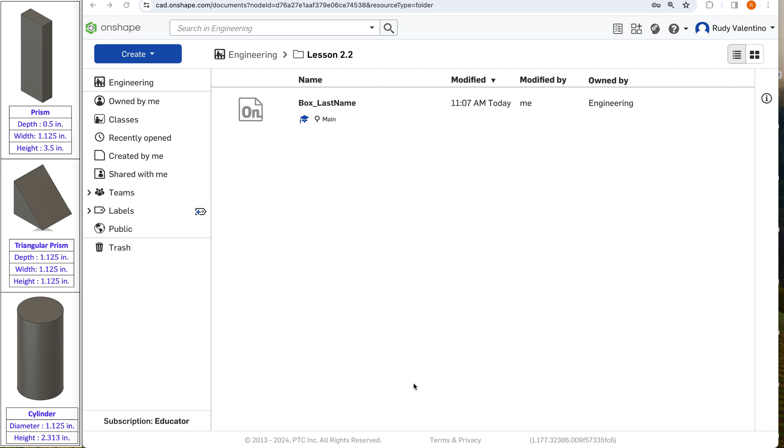We'll be rendering all three of these figures onto one design. So we made the cube, now we're going to create these.

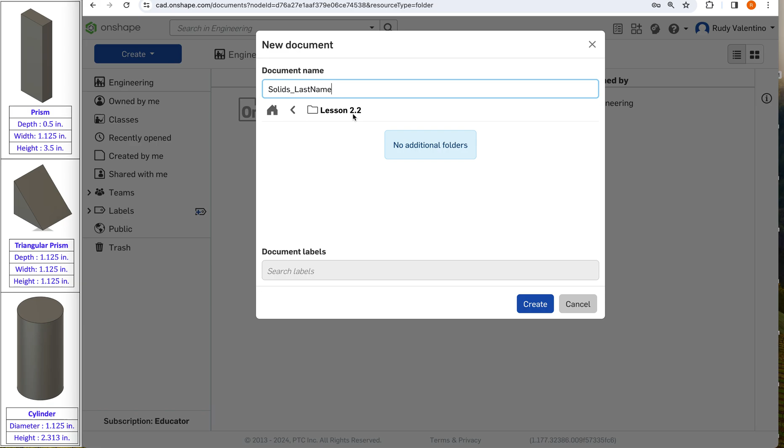The first thing you do is create a document, since we already have our folder, lesson 2.2. We're going to call this one solids underscore whatever your last name is. The last name will change from student to student, but that's what we'll save it as. So we've got our file right here. New file, once again saves automatically when you click back on Onshape, and we'll always have it.

So the first figure we're going to make is a prism. We're going to do 3 different sketches here, and each sketch is going to have a new figure. The first sketch is going to print the bottom of this prism. It's a half inch by 1 1/8 inches by 3 1/2 - 3 1/2 is obviously the height, and that's the one we're going to extrude.

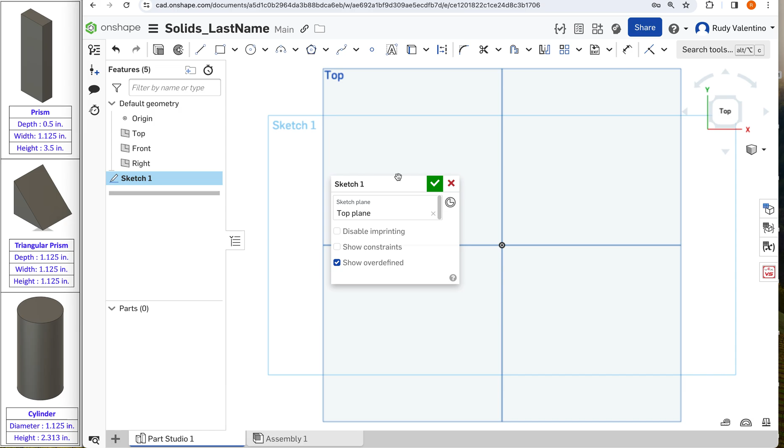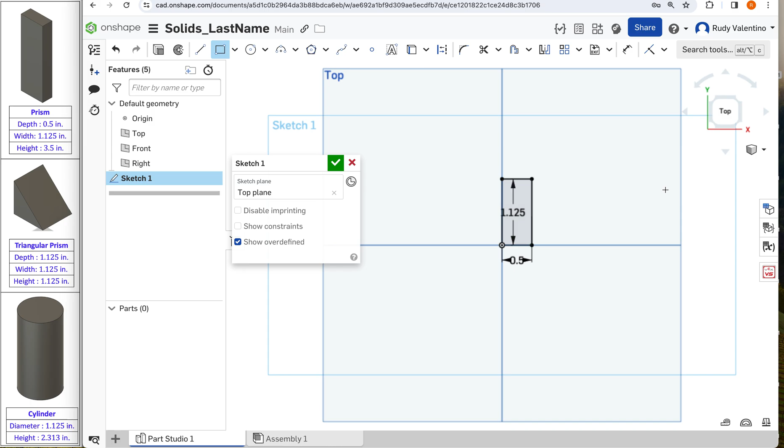So we're going to sketch on the top plane once again, click sketch top plane. I'm just going to drag this out of my way. I'm going to create a corner rectangle, use the origin, and drag it out. My dimensions are going to be 0.5, enter, and then my width is 1.125. It doesn't matter which way you go - if you do it the other way that's okay too, because you just want a rectangle.

Now notice right here my dimensions look kind of ugly - you can always pull the dimensions out, they look a little nicer, but that's for a later exercise. Anyway, we got our bottom rectangle. I hit there, then I hit my top piece so I can see a 3D view of it, and I've got a little rectangle here.

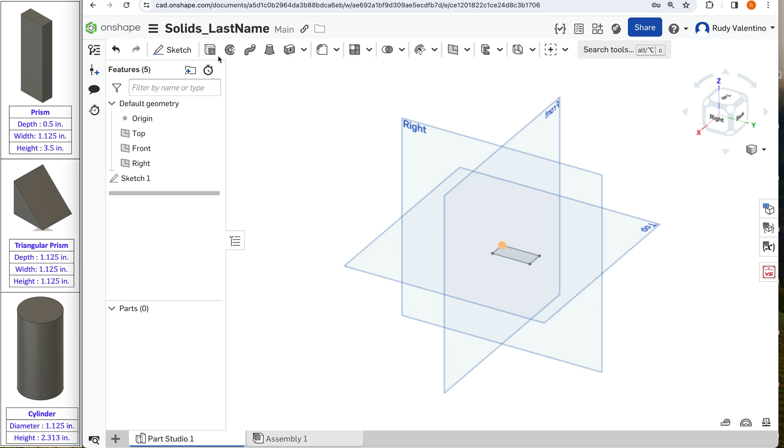Now I want to extrude this thing 3.5 inches. So I go to the extrude button, click on my rectangle, highlight it, and put 3.5. Notice I don't have to put inches - it assumes inches since that's the unit we've been using. I hit enter and it extrudes up. I hit my check mark and I am finished.

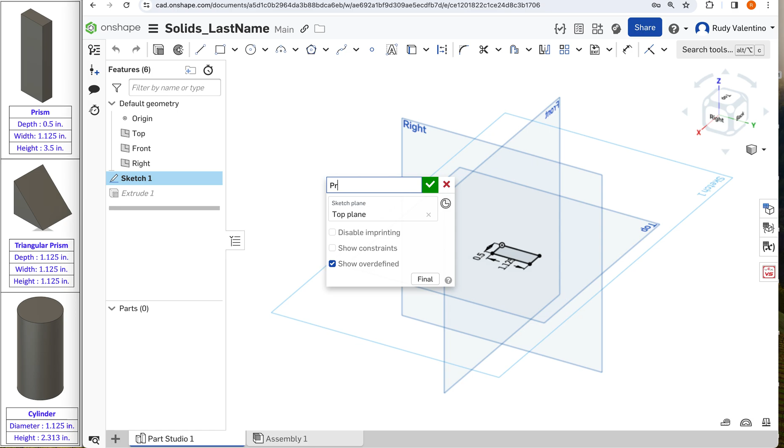So I have my first sketch all done - this is my prism. If you want, you don't have to, but if I click on sketch here I can go back and change it. I can also click on this little marker and call this sketch 'prism.' So now I know my first sketch is my prism, and I extrude it. Really the important part is that it says part 1 down here - that's the first piece. I'm going to name all these just to make them easy.

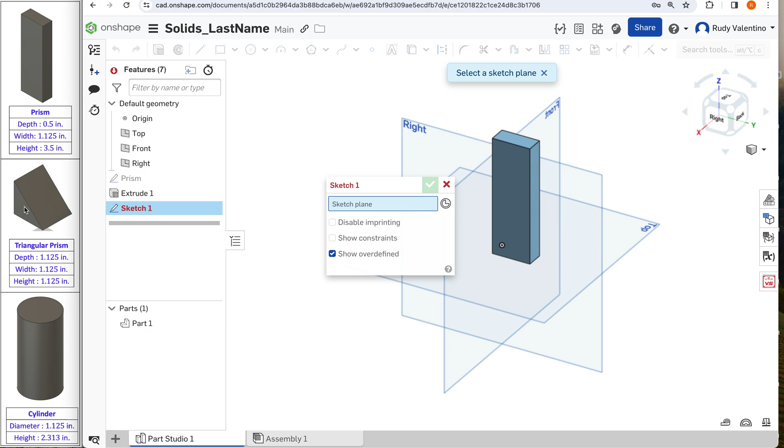So I'm going to go to my second sketch now. For this sketch, you can't sketch from the top because it's a triangle, so I have to sketch from either the front or the right hand side. I like to always sketch things from the front, so I click on these little sides to get to the word front, then click on these arrows - notice it spins around in circles. When I get to front, I click the word front, and when I click my plane, I sketch to the front plane.

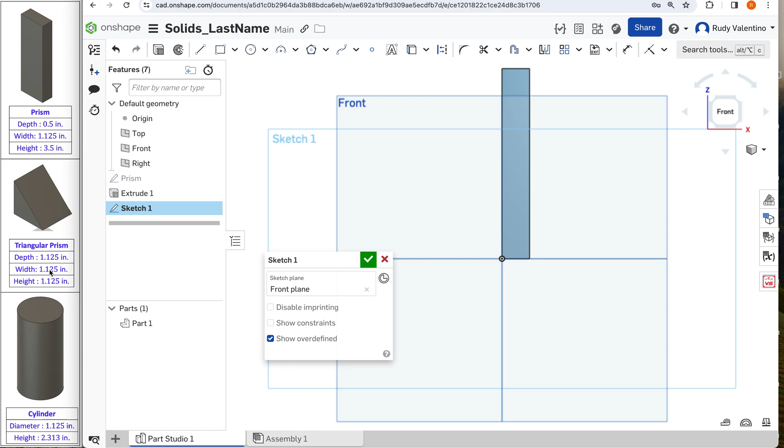Now I've got my front plane and I want to sketch a triangle. This triangle is 1 1/8 by 1 1/8 by 1 1/8, and the diagonal you really don't need to worry about. I'm going to click on line - I don't want it right by this, so I'll put it next to it. I'm going to use the x-axis as a starting point, drag it up, and then hit 1.125.

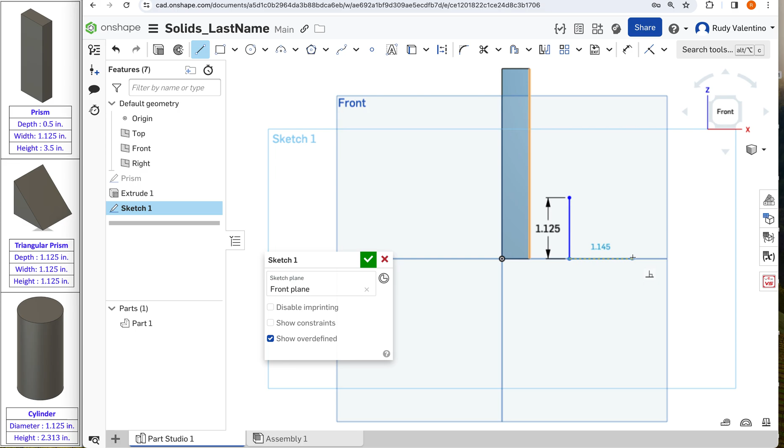Notice how it drags out - I don't want to try to guess what this is, so I just hit escape and draw another line. When I get towards this point, notice it gets highlighted - that's what I want because I want it connected. When I go towards this axis, notice it clicks into it. I click onto it, type 1.125, and hit enter.

Now I can use this one here to connect these two points, and they're connected. When everything is connected, I'll hit enter, hit escape just to clear that, and drag it out. If I click on this, it highlights them all, which means it's a closed figure - and you always want a closed figure.

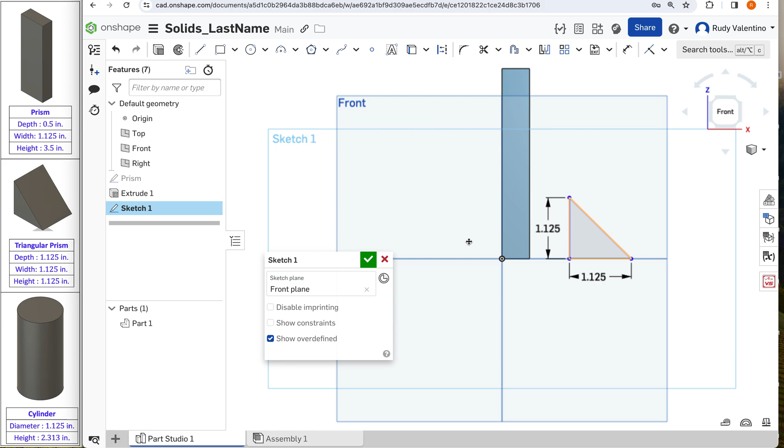So now I'm going to click on my triangle, click on my top corner, and now I'm going to extrude this. I click on my triangle, hit the extrude button - how much do I want to extrude it? 1.125. I go over here, highlight it, type 1.125, hit enter, and it's extruded.

Now say I want it to go in the same direction as this rectangle, because I kind of want them lined up. Instead of 1.125, I can make this negative 1.125, and that just extrudes it in the other direction. I like that better because I'm a little OCD and want things matched up.

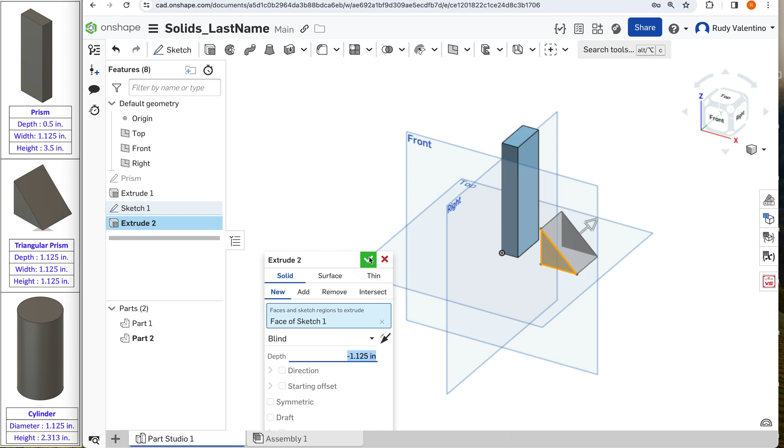So now I hit the check mark, and now I have my first 2 figures: my rectangular prism and my triangular prism. I'm going to double click on my sketch and rename this triangular prism, just so I know if I ever want to go back to it, and hit enter.

Notice part 1 is the extruded part of my prism, and part 2 is the extruded part of the triangle. So now I'm going to create part 3, which is going to be my cylinder. The cylinder is pretty easy, I'm just going to do another sketch.

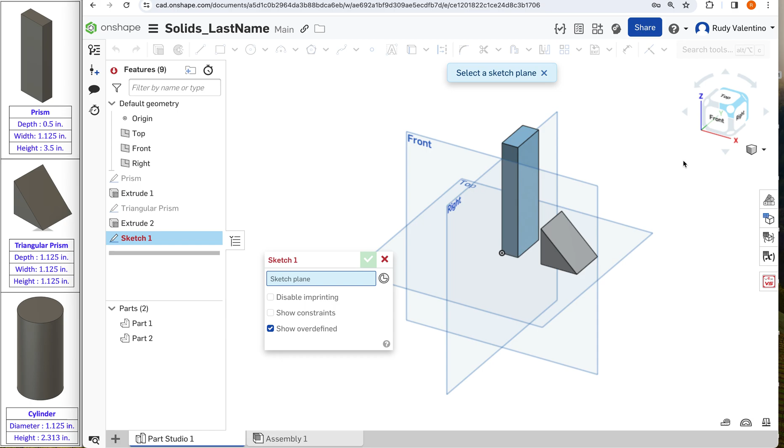If you want, instead of hitting top here, you can hit the top right there and have it sketch right on that top plane. The problem is I really want to see what I'm sketching, so that's why I go there. Hit my green check mark. Now we're sketching here.

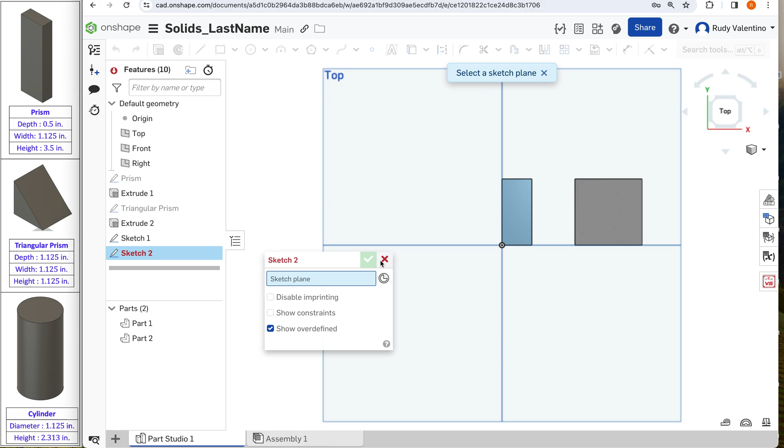Extrude, extrude. Now notice what happens here — I have 2 sketches, I made too many. So I'm going to double click on the sketch to go back here. By accident I hit the green check mark, I don't want to do that, but you can always just double click back into your sketch. It's on the top plane, which is where I want.

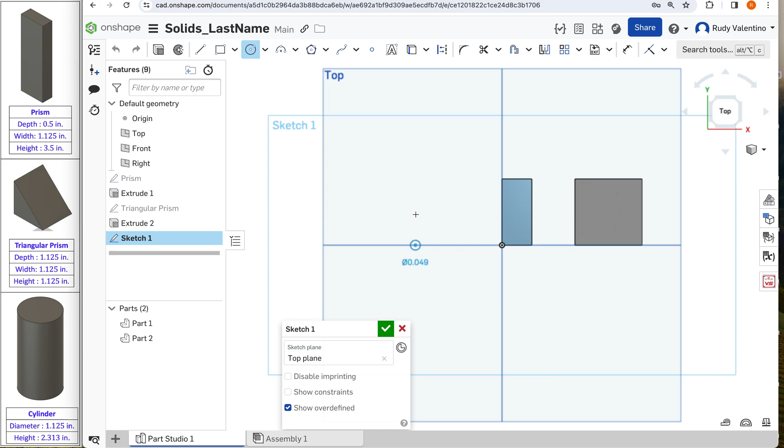I am going to hit a circle. I could do center point or 3-point — center point's fine. I'm going to use my origin, just drag this out, and my diameter is 1 1/8, so I hit 1.125, enter. So now I've got my circle.

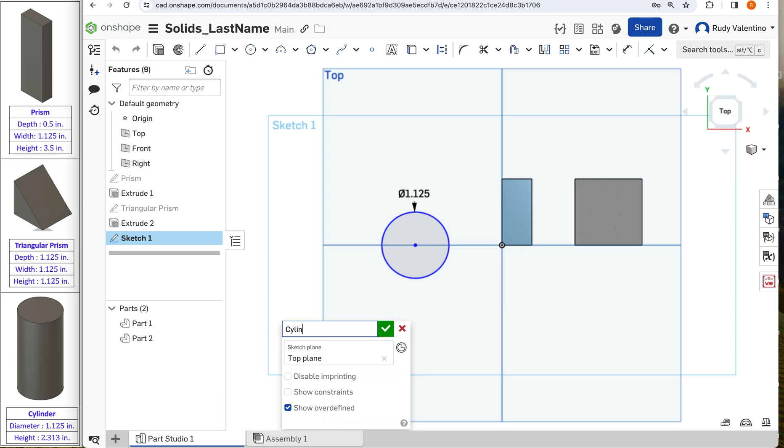I can close my sketch. You know what, maybe I want to come back in here and rename it — I'm going to call this a cylinder. Once again, this is just for me to keep everything organized so I know what everything is.

I click on my top right figure. Now I can't really see this, so I'm just going to click on different top right figures. There we go, now I can. Notice you go right through these other things — wait for it to light up orange. Hit your extrude. All right, we're extruding the face of the cylinder, which is good.

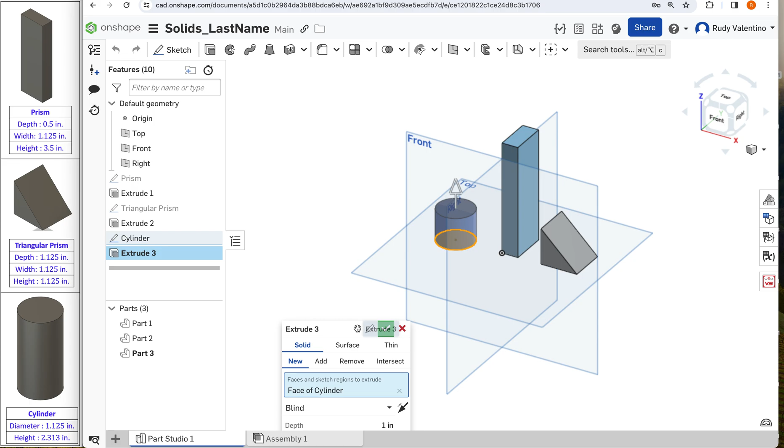I want to go up because I want it to be with the rest, and we're extruding it 2.313 inches — so 2,313 thousandths of an inch. All right, I'm going to hit the check mark button, and there we go, I have my cylinder.

All right, now I have all 3 parts. There's a couple things you may want to do here. First off, if you want to move these — say I want to get the cylinder in line with these — I can click on the top button. The way to move them is a geometric figure, and that geometric rule is called transformation. So we've got modify, linear pattern, fillet, thicken, loft, all this stuff.

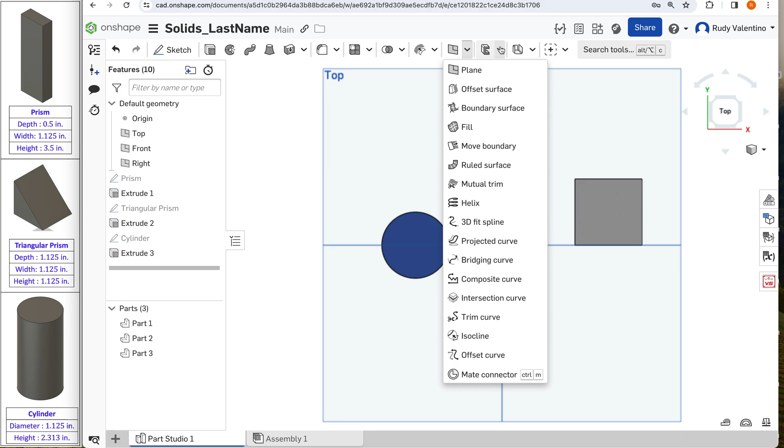We've got plane. If I click down on plane, you can see a bunch of other things. If I click down on this, you have more pieces — this is sheet metal, we're not really dealing with any sheet metal. This one, modify, you've got move face there. Now on this one which says Boolean, you have split and transform — that's the one we want. So we click on transform.

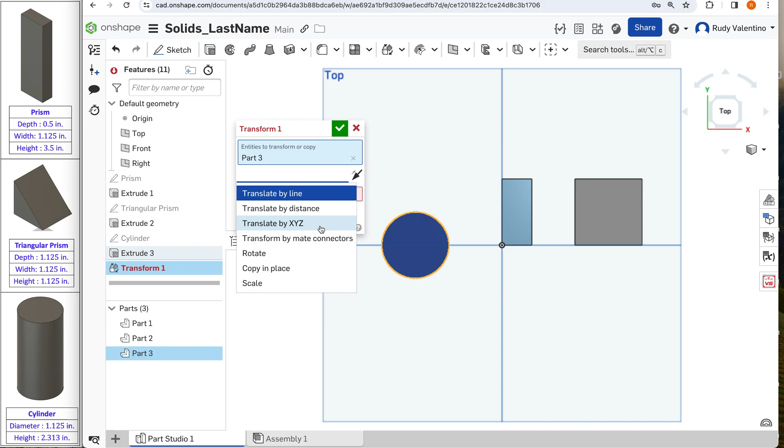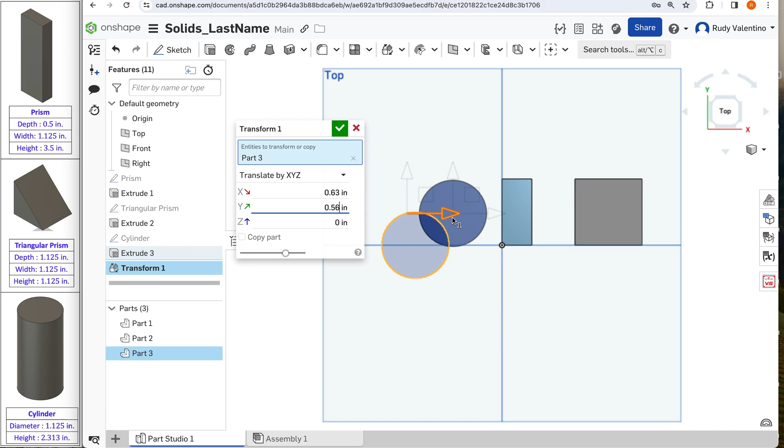If this whole thing was all extended, it'd be a little bit better. So if I click on this part, the translate you want to do is by the XYZ. When you translate by XYZ, it gives you perfectly nice pieces where I can just take this, slide it up, maybe move it down a little bit. You can actually do numbers here — say I want to move this up like 0.56. You can move it left and right at the same time if you want, though you don't have to. Then I can just hit my mark, and now they're all pretty much lined up.

Another neat thing you could do is if I click on the part and click with 2 fingers, or right click, I could do edit appearance. So I can take my first part and turn it yellow. I can go to part 2 — say I want to hit this and edit this appearance, maybe I want it purple, you could turn it purple.

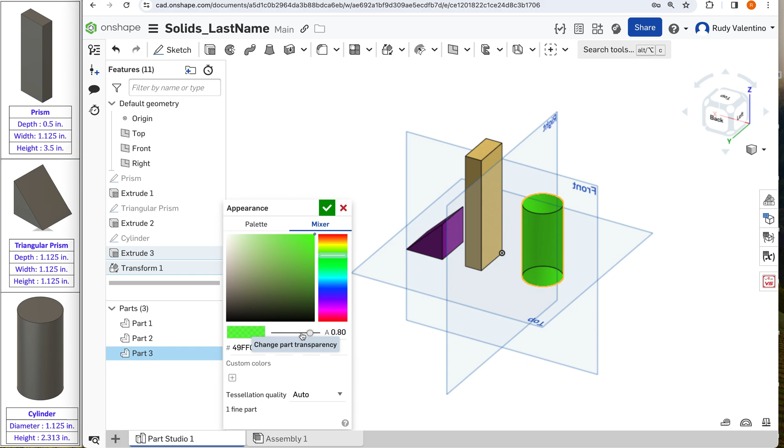I can go to part 3 and edit this appearance by hitting my 2 fingers, edit appearance, and pick pretty much any color I want. You can go to custom colors as well, go to the mixer and actually pick anything in there. You can take that, go with transparency if you want that, and do some pretty neat things. But in the end, you want to just pick a color that looks nice to you.

I'm going to rotate mine around a little bit — I like that. Command-Shift-4, and then what I'm going to do is screenshot my picture. And then, as you can see, it comes here. I'm going to upload that to Canvas.

So we are done creating our figures. We've got our prism — rectangular prism, triangular prism, and cylinder. I have the parts, and that's how I do that. If I want to do them all together, I can change their colors all at the same time, and then we can also make things from this as well. But this was the second lesson — it was fairly simple. And now we're going to move on to putting things together.